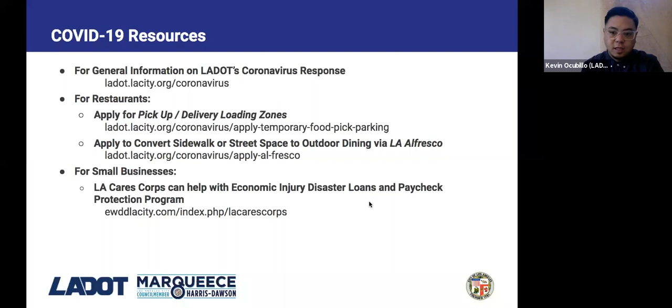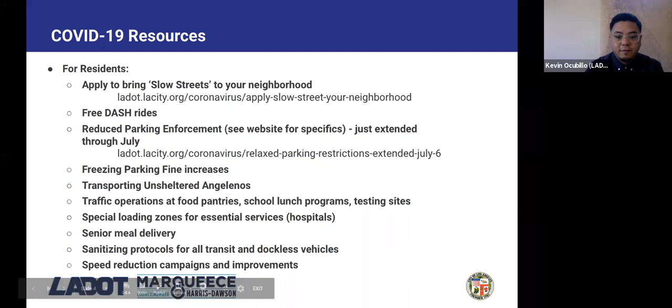Okay, cool. So for residents, we want to make sure that you are aware of our Slow Streets program. Prompted by the closure of neighborhood parks due to COVID-19, LADOT launched the Slow Streets program in mid-May of this year. Slow Streets allows community organizations to nominate a network of neighborhood streets for closures to non-local traffic, which provide residents a safe place to stay healthy, physically active, while socially distant. LADOT is prioritizing implementation and providing assistance to community organizations in dense, disadvantaged communities and neighborhoods of color.

So first, to talk about the background of the project. I assume many of you on the call are well aware of some of these pieces of background, but the project's been a long time in the making. In 2017, the city designated Broadway a priority corridor on the high injury network due to the high number of severe injury and fatality crashes.

Between 2008 and 2018, 34 people were killed or severely injured on this 2.2-mile section of Broadway, just between Manchester and Imperial Highway. And almost 60% of those people were walking or riding bicycles.

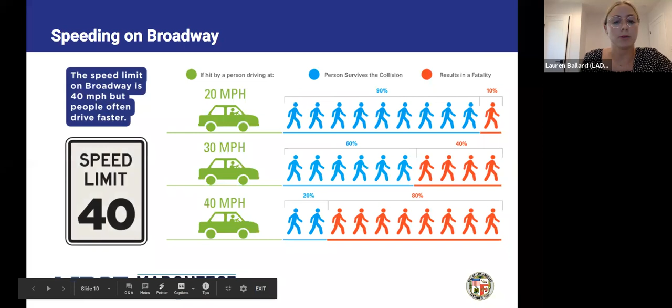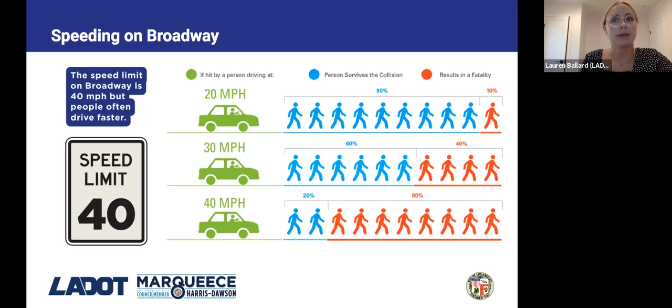Let's take a moment to talk about why Broadway experiences more than its fair share of crashes that severely hurt or kill people. One of the major reasons is excessive speeding and excessive speed differentials, meaning people are driving at different speeds. This is made possible by the fact that there are three travel lanes in each direction, and people are able to go fast and weave around other drivers they feel aren't going fast enough. This creates an unsafe environment for all road users, but especially for people walking and biking.

The speed limit on Broadway is 40 miles per hour, but people often go faster than that. And here's why that matters: if a person driving hits a person walking going 20 miles an hour, that person has about a 90% chance of surviving the collision. But at 40 miles per hour, the person has about a 20% chance of surviving the crash. As a city, we have a duty to keep people safe while they travel, whether they're walking, biking, driving, or taking transit.

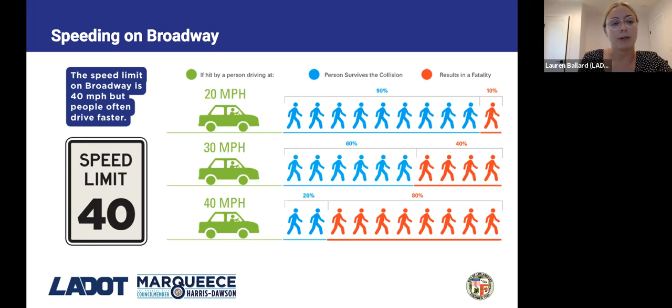A safer road design can go a long way towards making sure that people get where they're going safely. For that reason, between June 2017 and April 2018, the Office of Council Member Harris-Dawson and Streets LA conducted focus groups, surveys, walk audits, presentations, and different community events to engage residents in the process. And the resulting design was intended to make Broadway safer, more beautiful, greener, and would provide active community uses in the median.

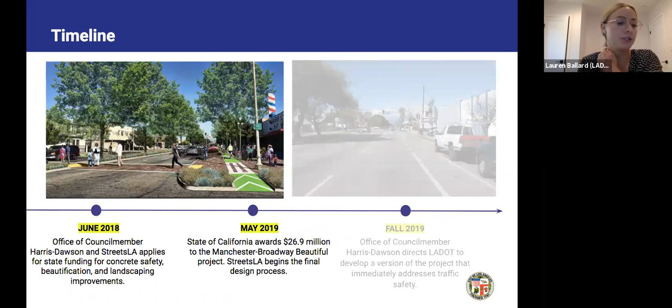In June 2018, the Office of Councilmember Harris-Dawson and Streets LA, one of our sister city departments, submitted an application with the State of California's Active Transportation Program to help fund this transformative project. The rendering on the left of this screen illustrates that project design. After a year of review, the state awarded the project $26.9 million in grant funding, and the final design process began.

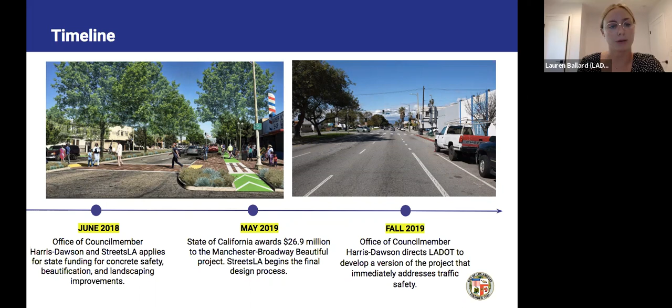But we know that major projects like this one take time to design and to construct. So in the fall of 2019, the Office of Councilmember Harris-Dawson directed LADOT to design a quick build version of the project to make Broadway as safe as possible, as soon as possible. And that's the project we're here to talk about today, this quick build safety project.

I'm going to take a break from our timeline to talk about the project goals. First, we want to immediately improve street safety along the corridor for all users of the street - people walking, biking, driving, and taking transit. This is a request that community members, the neighborhood council, and other folks have made of the city. They've said we can't wait for the eventual Manchester Broadway Our Way project several years down the road - they said we needed a safer Broadway ASAP.

Second, we want to pilot the street design that's coming as part of the Manchester Broadway Our Way project, which will break ground in 2023. By using materials like paint and plastic dividers, LADOT can install the proposed design quickly and then evaluate what works and what might need to be adjusted.

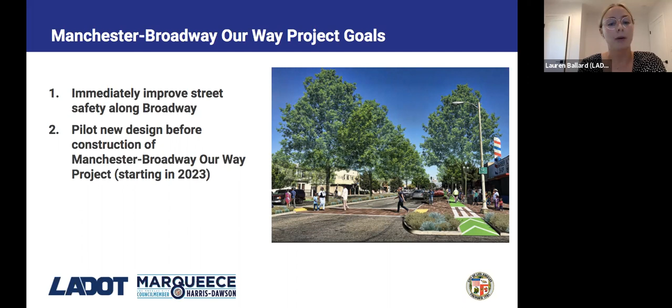Okay, so back to the timeline. The global COVID-19 pandemic has had a tremendous impact on all of us, including the way the city does its business. During the Safer at Home order, Streets LA, the city's department in charge of street resurfacing, developed a program called ADAPT. ADAPT fast-tracked a lot of street repair and repaving projects on major streets while traffic was lower, which allowed Broadway to be resurfaced. This is really important because whenever we install a safety project that involves a bike lane, we need to make sure the pavement is of high quality so we don't create an unsafe situation for people biking.

And that brings us to today, July 1st, 2020. We're in the middle of socially distant outreach right now, including this presentation. We've sent several mailers as a city, dropped off flyers with senior housing facilities, sent some email blasts, and made some calls to community organizations and residents along the corridor.

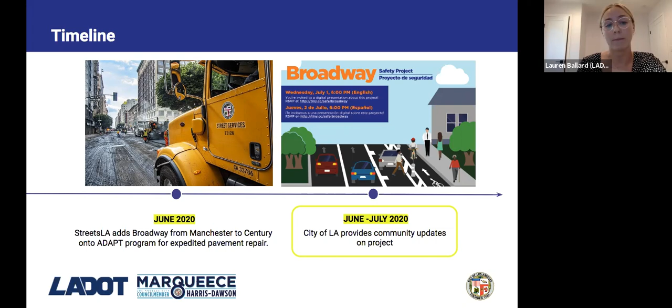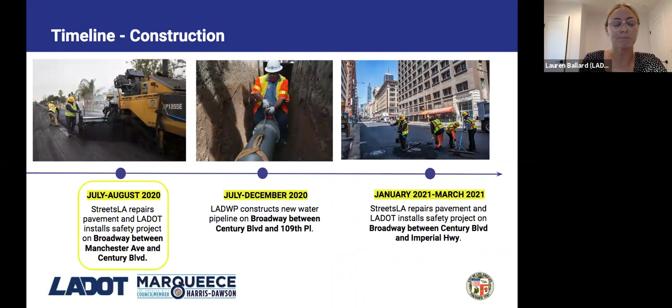These next two slides really get at the construction schedule that you'll see over the next 9 months. From July to August, the first phase of the Manchester Broadway Our Way project will be installed on Broadway between Manchester Avenue and Century Boulevard.

In order to do that, first Streets LA will come in and repave the road, and then LADOT will install the new paint and bollards. At the same time, from July through December, the Department of Water and Power will be constructing a new water pipeline on Broadway between Century and 109th.

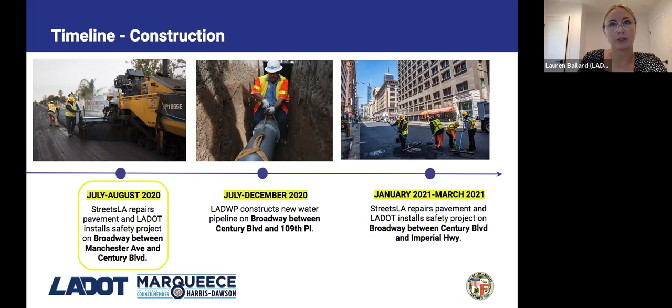Once that project concludes, likely beginning around January 2021, Streets LA will come back and repair the pavement from Century to Imperial, after which LADOT will install the safety project. At that time, that'll be the conclusion of this quick build version of the Broadway Our Way project.

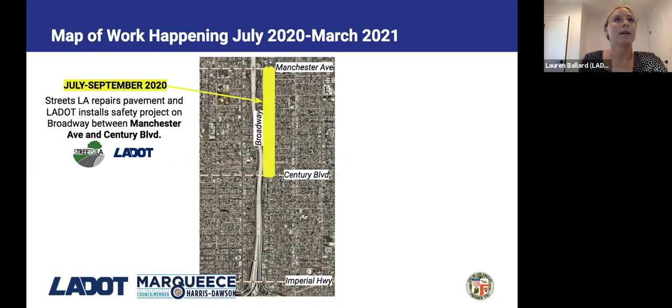This next slide is just an illustration of what I just talked about, showing those different phases of the project. From July to September, Streets LA and LADOT will be doing the work from Manchester to Century. At the same time, on a longer project timeline, from July to December, LADWP will be doing their water pipeline construction from Century to 109th Place. Then once that project concludes, we'll come back in January and finish the project from Century to Imperial.

Now that we have a better understanding of the project timeline ahead of us, let's talk about the safer street design that's coming this summer to Broadway. We're going to focus on the first phase of implementation that begins this month on Broadway between Manchester and Century, which is a zoom in on the right side of that project area.

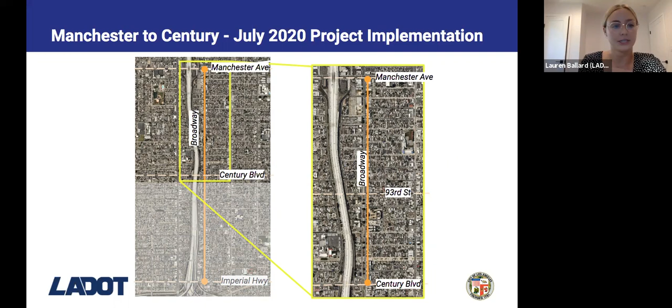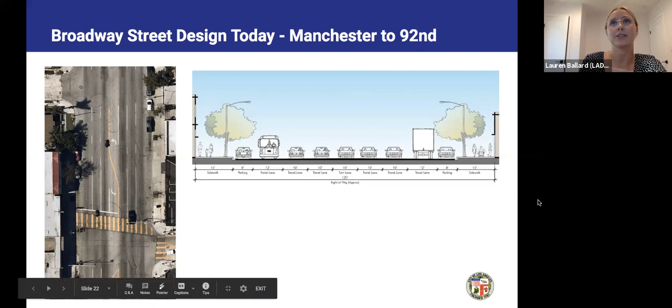South of 93rd, you have a 160 foot wide right of way with a 40-foot median in the center. And you also have a bike lane.

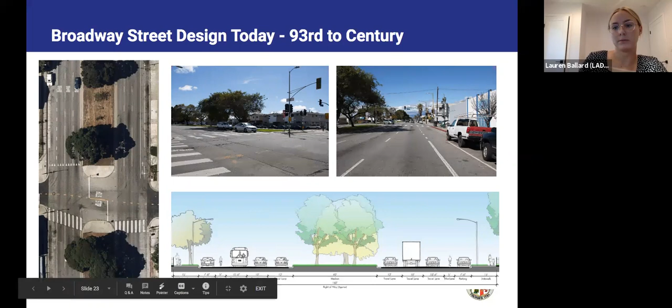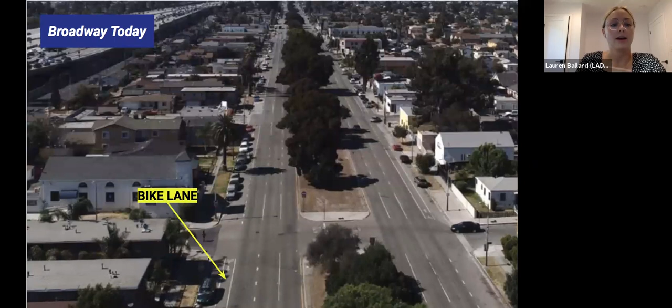Here's another look at Broadway from above in the wider section where the median is. Once again, you can see there's a parking lane against the curb on either side of the street, a bike lane between the parking and the 3 travel lanes, and 3 travel lanes in each direction.

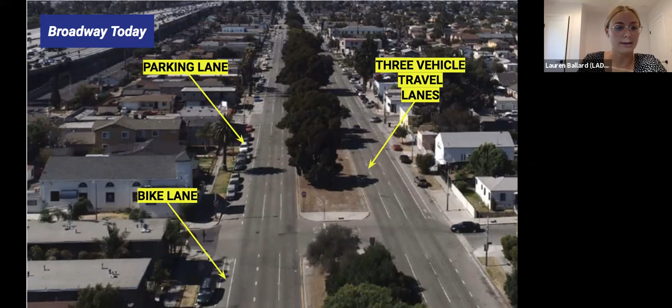So how will this look? How will the street look once the final project is installed in several years? Here's a rendering that was developed a couple of years ago as part of the grant application and that initial phase of outreach. It'll look something like this. This is the project that will break ground in 2023 and will be constructed using major local and state funds.

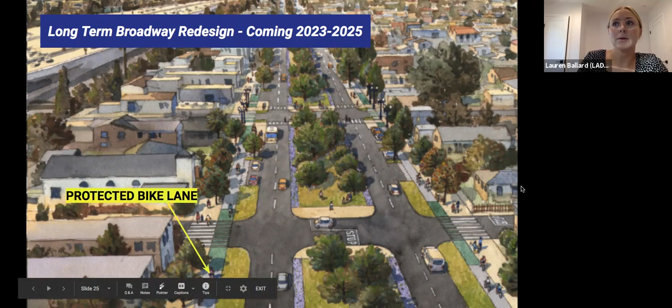In the future of Broadway, there is a protected bike lane against the curb. It's protected from moving traffic by concrete and planters with trees and plants, as well as by a line of parked cars. To make room for the protected bike lane and to calm vehicular traffic, the number of lanes is reduced from 3 in each direction to 2 in each direction.

We know that this is a typical street design that is proven to be much safer than the existing conditions.

Here's another look at the future of the Manchester Broadway Our Way project from a slightly different angle. This one, we're on the ground, we're in an intersection, and we're looking towards one side of the block.

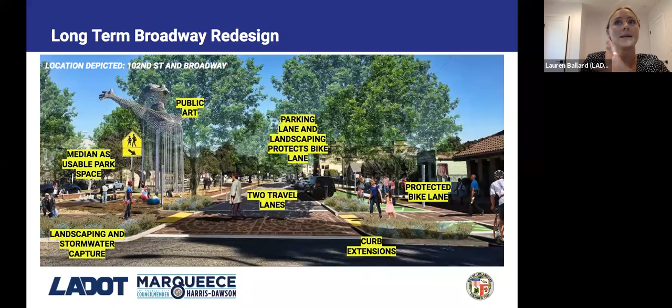Again, we see a protected bike lane against the curb, protected by a parking lane and landscaping. We also see 2 travel lanes in each direction and curb extensions that shorten the distance people need to cross the street, making it much safer for people walking. The median acts as a park with additional landscaping and stormwater capture, as well as public art and other amenities. This is the long-term future of the project, but the near-term project looks a little different, but it should look familiar.

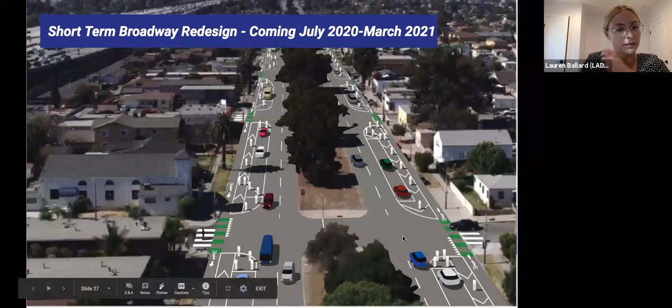This is a sample of the design that will be installed over the next several months. Just like in the Manchester Broadway Our Way project, there's a protected bike lane next to the sidewalk. The bike lane is separated from vehicle traffic by the parking lane, which is pulled out away from the curb.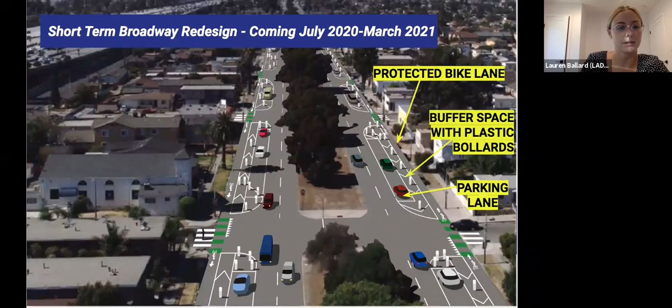In between the parking lane and the bike lane is a buffer space with vertical plastic bollards. There are 2 travel lanes in each direction, and at driveways and intersections, there will be green paint to help raise awareness of potential conflicts between people driving and biking.

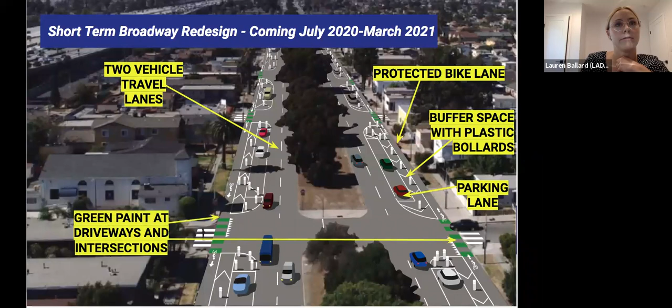Here's another style of graphic that will be posted along Broadway to help people get used to the new street configuration. People biking should use the new bike lane against the curb, and people parking and loading will park in the designated spaces between the bike lane and the driving lane. It's important that people parking and walking to the sidewalk are mindful of people biking, and that people biking are mindful that drivers may need to cross the bike lane to reach their destination.

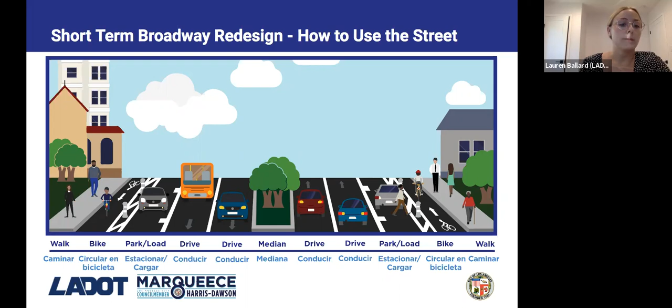People driving should be mindful of people parking and exiting their vehicles, and people driving who are making turns should always check for people biking and people crossing in the crosswalk, of course.

The new design will have some impact on street parking, and I'm going to turn it over to my colleague Andy to talk a little bit more about the details of that.

Thanks, Lauren. As Lauren mentioned, with all the pros that come with the project, such as the safety improvements, the beautification, and the connectivity of the bike lane, there are also some cons, and the main one for this project is parking loss. There are about 200 existing spaces along the Broadway corridor. We're projected to lose about 88 to 90 spaces, which is about a 45% loss, leaving about 110 spots after the project is complete.

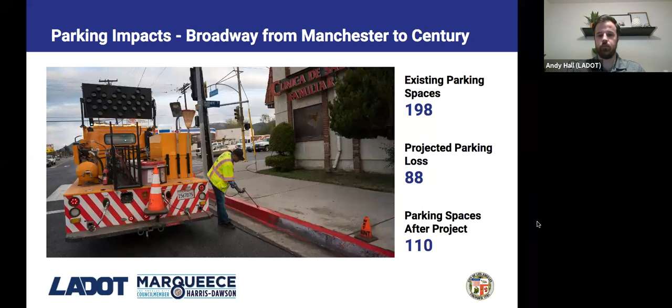The main reason for the loss of parking is that whenever we come through and change the striping or resurface a street, we need to update it to the newest safety standards. Since Broadway was originally striped, the city and various national safety standards have been updated, and we need to bring the street up to those standards.

Mainly those standards deal with sight distance and other aspects that add red curb to the project. Another reason for the parking loss is the protected bike lane: at driveways or intersections, additional red curb needs to be added for visibility. The same applies to bus zones and right turn zones, where red curb is needed to get turning vehicles and buses out of the through travel lanes. We'll give you some examples coming up of all those.

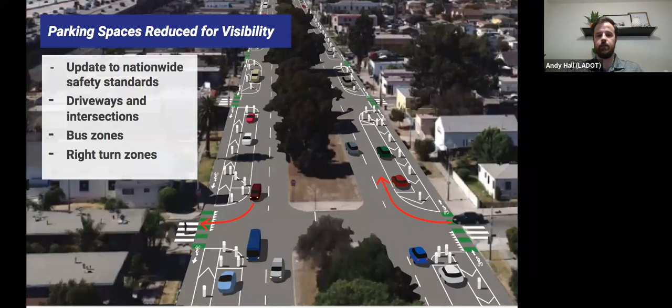The first example is visibility coming in and out of driveways and side streets. As you can see, to the left of the red car there's a larger buffer area with only two blue parked cars, as opposed to the right side where there are more parked cars. This buffer is needed so you have visibility to see cars coming down the street before you can turn onto it - you need a little more space so that red car can see the green car that's coming along.

Another reason for parking loss: because the bike lane is against the curb and cars will be parked between the bikes and the travel lane, there needs to be a gap in the parked vehicles before side streets so that any bicyclists coming along can be seen by drivers. The same applies to people crossing the street - we can't block their sight line or block them from being seen by drivers.

In this example, the red car coming along needs that space marked with white dots and no parking, to be able to see the bicyclist in the bike lane and the person crossing the street. If cars were parked all the way up to the side street, drivers wouldn't be able to see those people and could potentially hit them when taking the corner without being able to see them.

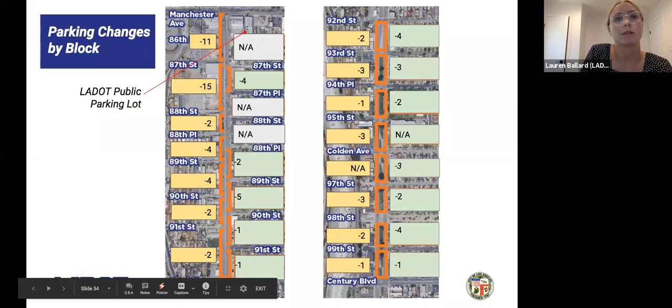Here we just have an example of the parking loss per block. We can bring this up later in the Q&A section if anybody wants more information about the losses per their specific location.

One location I wanted to highlight: you see larger numbers between Manchester and 87th or 88th Street on the left side, the west side of the street. The reason for increased loss there is that we wanted connectivity between the Broadway bike lane and the Manchester bike lane that will go in later. The only way to do that is to eliminate parking along the west side due to various issues with the geometry of the street and the way the roadway narrows after Manchester.

This was the only way we'd be able to do it. We can't have a shared style bike lane where bikes share the street with vehicles due to the 40-mile-per-hour speed limit on the street, so we can't do that with sharrows. That's the main grouping of the parking loss for the corridor, but the rest is just spread out slightly throughout the rest of the corridor.

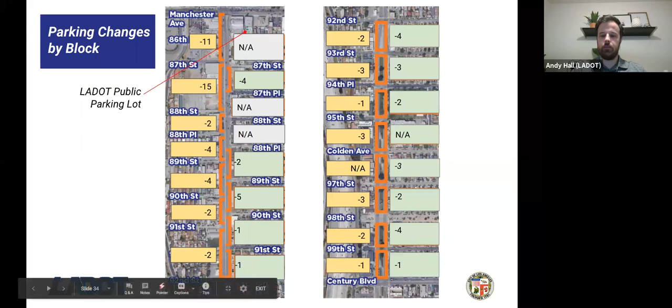Sorry everybody, I was having some trouble unmuting myself. Thank you, Andy. You're welcome.

We know it's tough to hear about parking impacts, but we want to reiterate that this street design will save lives and reduce severe injuries from traffic crashes for a number of reasons, and these are just a few of them.

We also know that with two fewer vehicle travel lanes, people crossing the street have to navigate fewer travel lanes and have fewer potential conflict points, resulting in a generally more comfortable crossing experience.

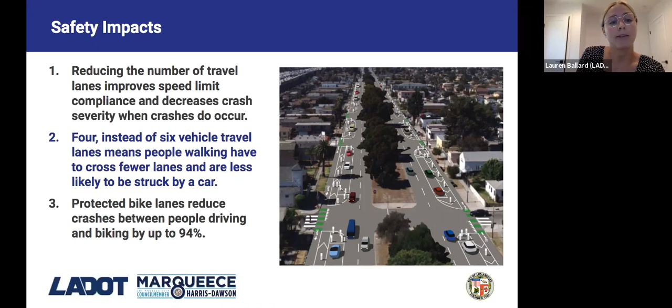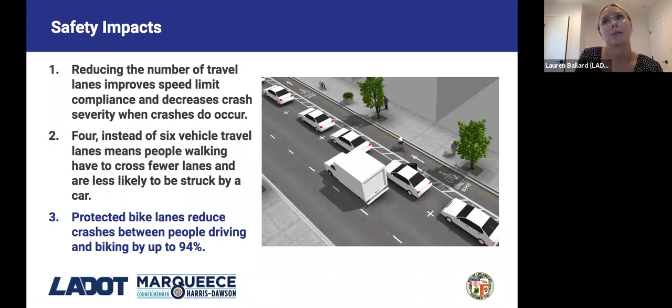And finally, protected bike lanes have been shown to reduce crashes between people biking and driving by up to 94%. So it's really the safest possible configuration for people biking, and it has that huge benefit.

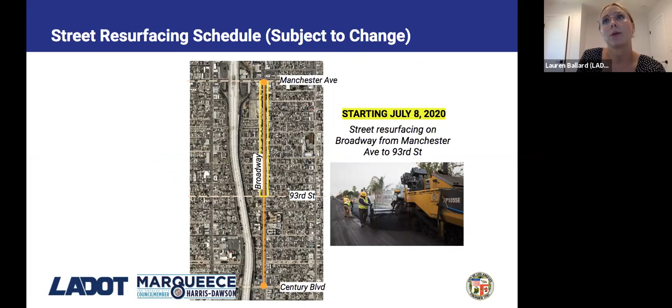What we're really talking about here is July to December of 2020. Starting July 8th, Streets LA will be resurfacing Broadway from Manchester to 93rd, which will take a few days and look something like what you see in this photo.

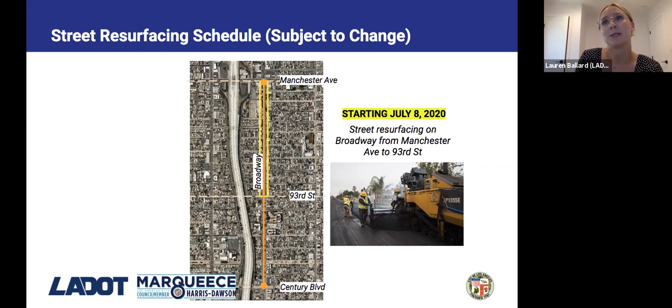Then starting July 10th, they are going to be resurfacing Broadway from 93rd to Century on the northbound side, east of the median. Then starting July 13th, they'll hop over to the southbound side, west of the median.

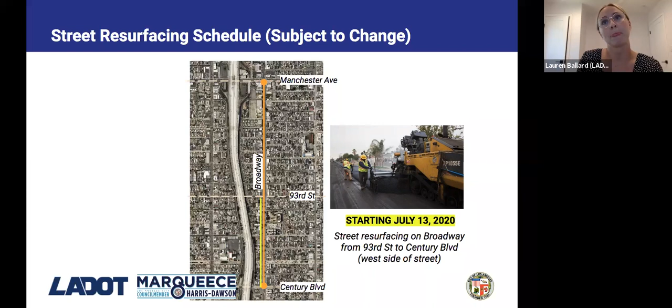Once that work is complete, LADOT is going to come in and install the safety project. So depending on how long the Streets LA work takes, that's when we'll be coming back. It may take a few days between those two projects, but we'll be coming back and striping the roadway with the new safety project and installing the bollards.

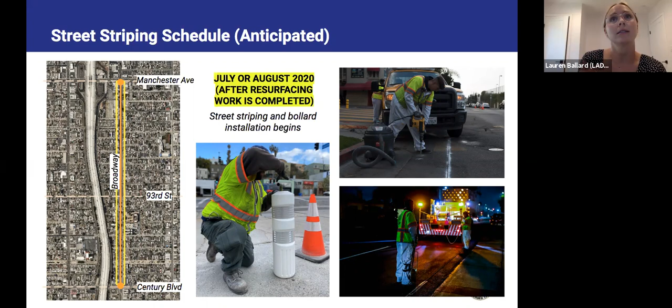It's really important to be aware of any no parking signs that you see during construction. Vehicles will be towed if they are parked in the area of construction during the work. So there will be signs posted in advance. Please make sure you're looking out for those. They're posted at least 24 hours before work begins, so tell your neighbors and friends to look out for those.

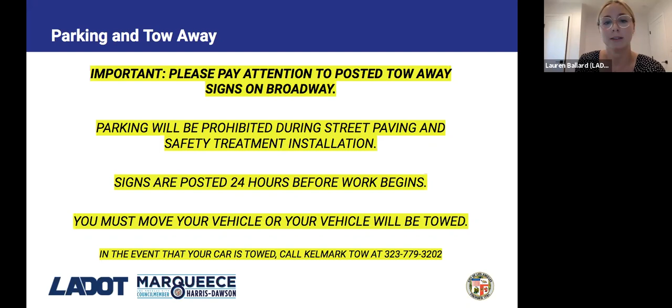There are three different departments doing this work, and they all have different contact information and are responsible for different parts of the project. We know that for the most part, no one but city employees really cares about or knows the differences between the departments. But if you're able to recognize, oh, that's street resurfacing, or that's a plastic bollard being installed, and you want to talk specifically about that, these are your contacts. But you can also always just contact us at LADOT if you notice work being done that you want to talk about, and we can connect you to the right folks.

Before we transition to the Q&A, I'll turn it over to Esmeralda with MIG to talk about upcoming community efforts and design efforts around the Median Park.

Great, thank you Lauren. Hello to everyone. I see some of the names in the participant list and I'm glad to see that there are folks who are coming back.

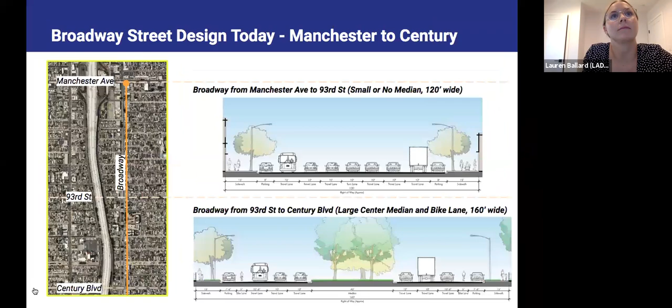Sorry. So I think it's a really good question, and thank you for bringing that up, Ari, because it's really important for folks to understand how LADOT is gathering the data and how we're using it to inform the design and decisions we're making about infrastructure.

The 34 people who were killed or severely injured that are captured here is all people, no matter what the preceding action was prior to the fatal or severe injury crash. The distinction is that at LADOT, and really as a city, we've shifted our approach to one where we support all road users and design a safer street for everybody.

So that includes, if there's a lot of people who are traditionally what we call jaywalking at a certain block that doesn't have an existing crossing, we would move to provide a new crossing. Or if people are biking in a way where vehicles are nearby, we want to provide a safe place for them to bike.

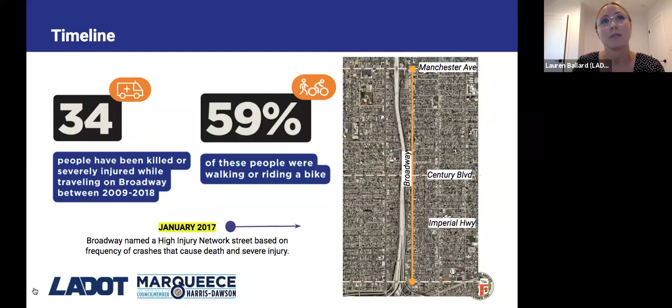It's really important that we protect the most vulnerable users of our streets, because when we do that, we make everybody safe. So that's just a point of clarification.

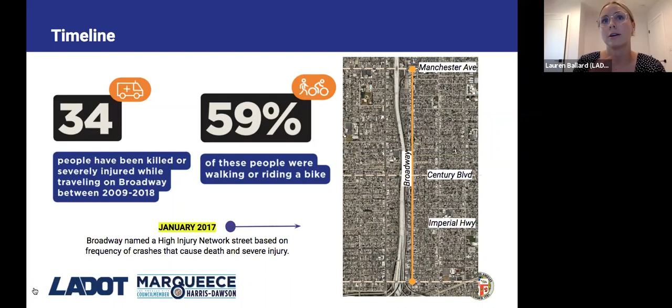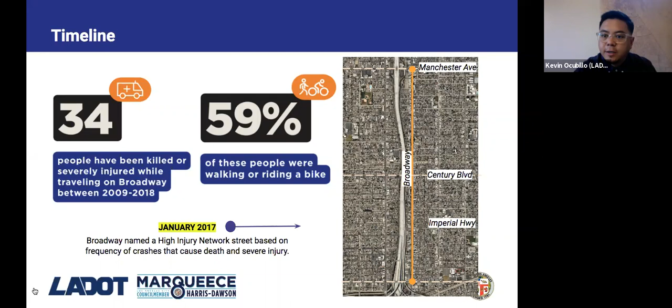Awesome, thank you, Lauren. So to the second part of the question: what's the plan for the median? It sounds like Ari can foresee a situation where the median becomes a place for people to camp out rather than an active use. I know that's not covered as part of the LADOT safety project, but maybe somebody from CD8 or MIG might be able to talk about the plan for the median.

Sure, I can speak to that. We'll be starting an engagement process to talk with you all about the best way to address what we want to see in the median, and really think about and discuss how we want to manage folks who may be homeless or unhoused, and figure out the best ways we can use different design techniques.

What can we do to make sure it's something that's both inviting to the community and also not necessarily a place where we'll see large encampments. I think there's ways to do that, and we're going to have that discussion with you all over the next couple of months as we think about what we want the median to look like.

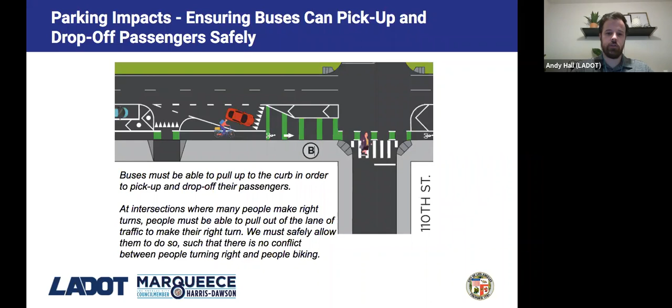So like what Kevin mentioned, one of the needs for the parking loss is mainly due to the protected bike lane that's up against the curb now. Currently, for some portions of Broadway, the bike lane is away from the curb, so parking can be up against it. But with this new protected bike lane that's much safer, as Lauren had mentioned in the presentation, there needs to be additional visibility and clear spaces included so that bicyclists and pedestrians, like shown on the slide right now, don't get hit by turning vehicles going into side streets or driveways, like we showed in the presentation before.

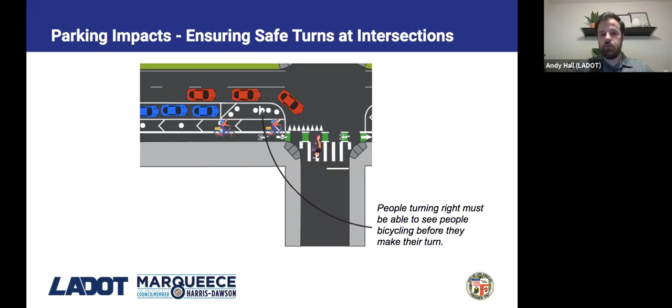To get that clear space, we have to remove some parking, because before, vehicles were able to park further up, closer to the intersection, without regard for the additional visibility that's needed.

Right, so it sounds like the parking loss is really there to accommodate all of the safety improvements, and to ensure that we're able to protect the pedestrians and bicyclists, the folks who we know from the statistics are disproportionately getting severely injured or killed on Broadway. So thank you for that explanation.

Yeah, exactly. The reason we're doing this is to improve safety. We wouldn't remove parking just because we wanted to, or to make it look cleaner. The reason we do it is for the safety aspect.

It's important to reiterate that LADOT's designs are really a placeholder for the larger streetscape improvement coming down the line, in terms of trees, concrete, and all the new pavement. So it's a transition to help the community warm up to that eventual change, and really make Broadway a safer, more connected, active corridor, consistent with the outreach and what folks found in the visioning process that MIG led in the past.

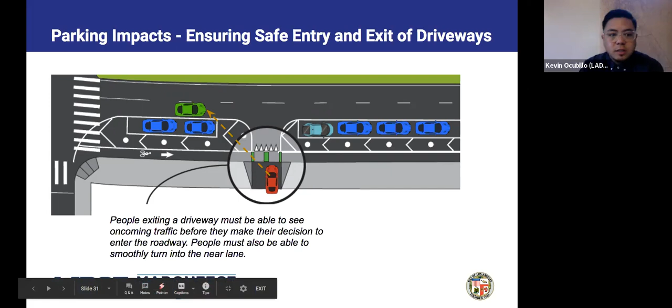This is a transit question from Itzel Ronson: are the bus schedules and paths being affected by these changes? The short answer is no. Okay, cool.

Another question, from Cordell Clark: is a facelift for businesses going to be necessary, and will there be anything available to finance that? This is a little outside the scope of what we're talking about today, but maybe Albie or Lamont can speak to any grants or facelift programs that businesses could take advantage of on Broadway.

Sure. Like Kevin was saying, this project is really focused on infrastructure, looking at our streets and eventually our sidewalks and the median park. So it's not necessarily going to look at any type of investment on private property. I think there are some resources available, particularly for business owners dealing with the COVID crisis.

I do think you're absolutely right that we'd like to see more private investment in the corridor to help business owners redo facades, update equipment, and similar improvements. We're always looking for different grant sources for that. If business owners are looking for that kind of help or technical assistance, they can reach out to our office, and we'll connect you with resources and organizations that can help you think through those changes.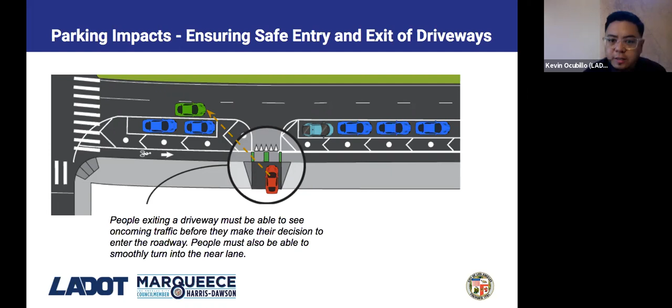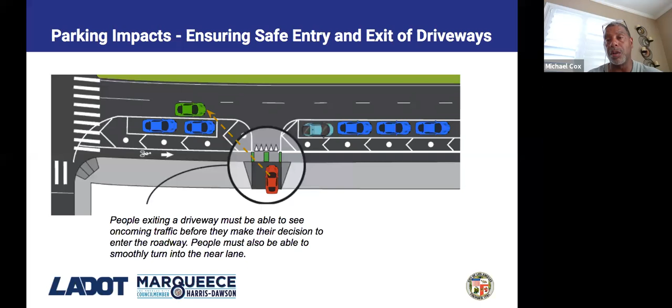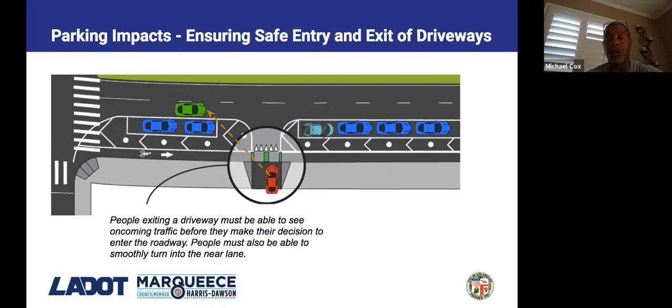We're definitely going to do a flyer on the door. Sometimes on large scale projects like this one, when we see numerous cars parked, we'll do a flyer on the door and a flyer on the windshield of the vehicle. So I'm probably going to recommend to our team that we not only do the flyer on the door, but really flood the area with notices on the cars so people know and understand when we're coming.

Awesome, thank you — that'll be helpful. When we've talked to some folks in advance, we know that sometimes people park two or three blocks away from where they live, so it's good to hear that Streets LA will be out there aggressively with the flyering.

We have one last question that we received earlier this week — if you want to ask a question, please drop it in there. This question was from one of the seniors we talked to earlier this week: they're asking if the governor or mayor shut down all businesses except essential workers after the project begins, will repaving continue? That's a relevant question considering new orders from the governor that just came down today — how will social distancing requirements impact the work for the BSS crews?

During the whole pandemic, we have actually been out doing work on major thoroughfares such as this one. It's been a little easier because there's been less traffic. Our crews are wearing face masks and practicing social distancing. One of the things I do when I go out during the day and see the crews is make sure they're practicing social distancing and everyone has on their mask.

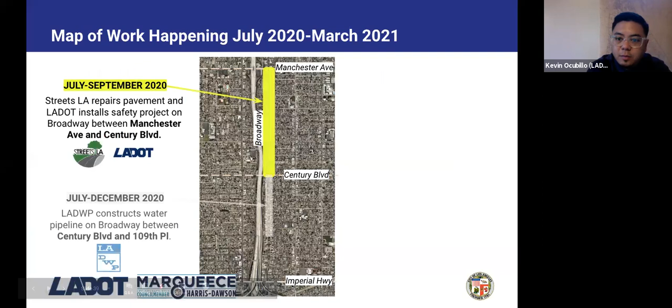And then again in the future, once the second half of the project, everything south of Century, once LADWP completes their project, we will be going out to the community again to talk about these things. So this is certainly not the last time you'll be hearing about this project, or having the opportunity to engage directly with the planners, engineers, and people working on and designing the project. On top of that, we know CD8 and MIG will be leading a series of workshops specifically about the public space activation portions, the things happening in the median and those other parts.

So we're really at the beginning of a journey here together. And I want to thank everybody for joining in today.

We will be sending out a summary of all the questions we did tonight. We'll be typing them up, posting them, and sharing them here via email, so you can share those with your friends or family or people who weren't able to make it tonight.

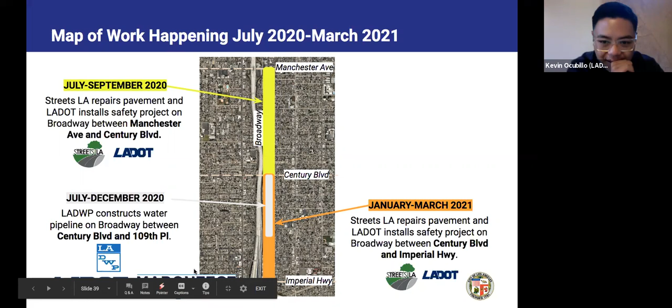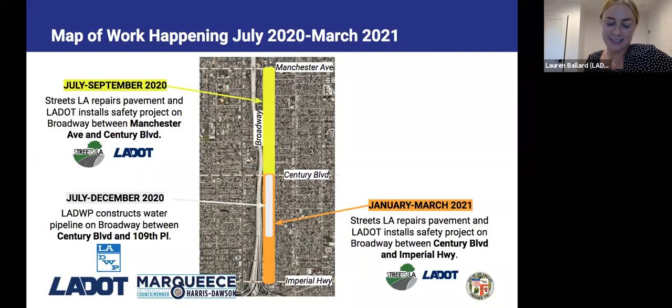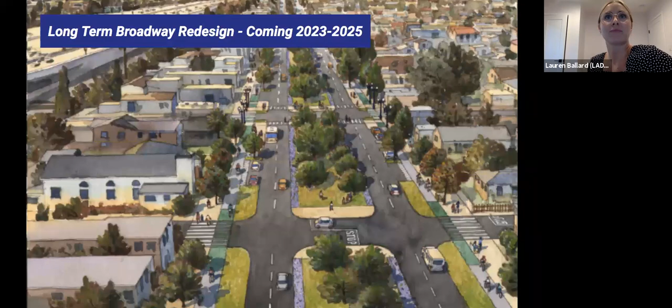Okay, well thank you all for attending. Really appreciate it, and please stay in touch with us. Please stay in touch with CD8. We want to hear from you. We need your voices, because after all, this project is for you and it's in your neighborhood. So we want to make sure it serves your needs and serves the community as best as possible.